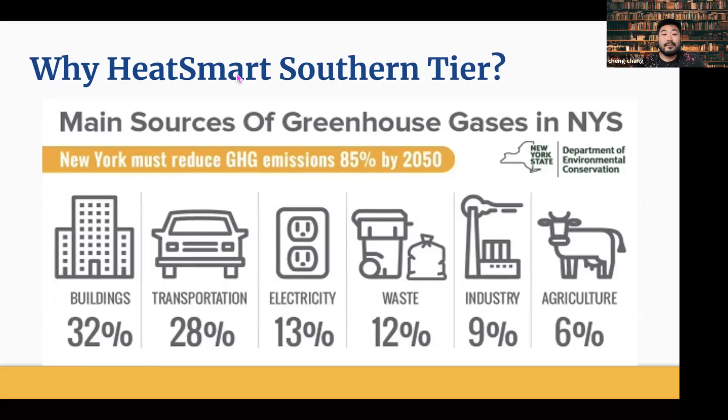Let's talk about the benefits of HeatSmart. Some of the biggest draws to participating in the HSST program are the individual benefits. Installing clean energy technology can help reduce your energy cost while increasing your home comfort and safety. You can also make a positive contribution to your local and global communities by reducing greenhouse gas emissions and increasing awareness about the importance of clean energy.

We work with lots of different municipalities in the southern tier to become clean energy communities. This is another program run by NYSERDA that gives awards to municipalities that make clean energy and other sustainable improvements. If you make clean energy improvements, like increasing the energy efficiency of your home or installing heat pumps, you earn points for your municipality. These points can turn into financial awards like grants to support other sustainable improvements.

So what does HSST cover? This program will mainly deal with weatherization and heat pumps. The goal of weatherization, such as insulation and air sealing, is to protect a home from outside elements in order to maximize energy efficiency. Heat pumps are technology that provide clean and efficient energy for heating and cooling your home. Our program focuses on ground source, air source, and heat pump water heaters. We'll talk more about these technologies in the next few slides.

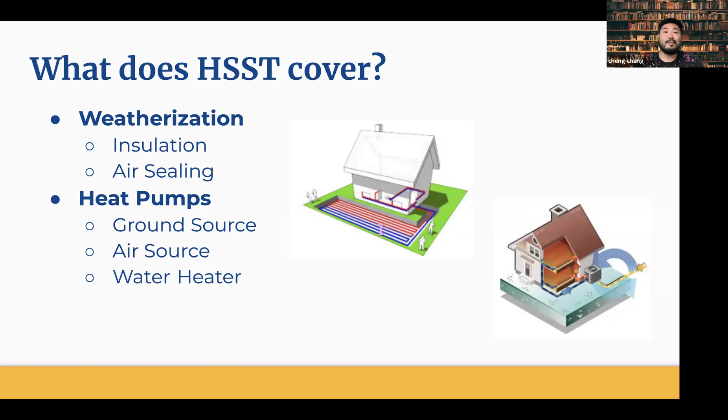Now please allow me to introduce Bhavi to talk more about HeatSmart technology. Thank you, Chang, for the amazing introduction. I will now move on to the technology portion of this webinar.

So the first step, if you were to go through our HeatSmart program, is weatherization. The diagram on the right shows common air leaks in a typical home. The red arrows show hot air escaping through the attic, and the blue arrows show cool air getting into the basement. Weatherization is the practice of protecting a building from these air leaks through insulation and sealing.

Reducing the air leaving and entering the house also reduces the need to burn fossil fuels or use electricity for temperature control. This optimizes energy efficiency, so it's good to weatherize your home whether you are getting heat pumps or not. If you have concerns about temperature regulation, ventilation, air quality, or moisture problems, these are also good reasons to look into weatherizing your home.

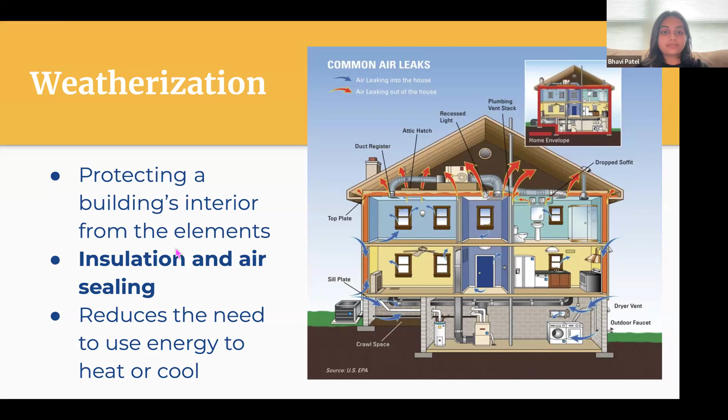There are many benefits of weatherization, such as reducing your energy consumption and costs. With a tightly sealed home, there is a lower chance that heat will leak out or that unwanted cool air will infiltrate your home, increasing home safety and comfort. If your home is properly weatherized, it will reduce drafts, improve humidity control, improve indoor air quality, and reduce the risk of ice dams. Overall, weatherization makes your home more comfortable to live in and more energy efficient.

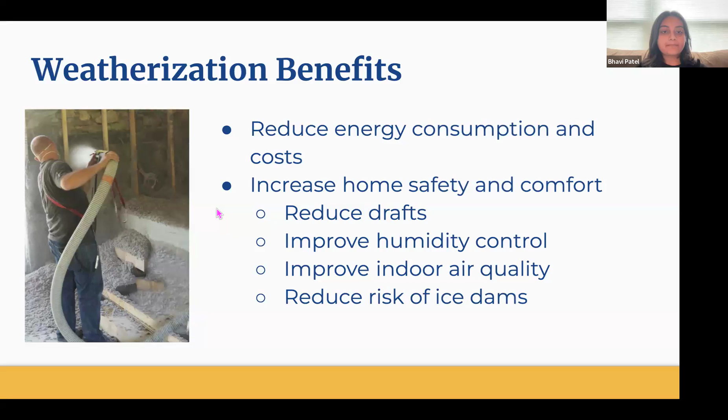Heat pumps are an alternative system for heating and cooling your home. While traditional systems use fossil fuels, heat pumps use electricity and offer a more sustainable way to heat and cool your home. This diagram shows how heat pumps work. There's always heat in the air and the ground, even in the winter, so heat pumps simply move heat into a space or out of it using a compressor instead of burning fossil fuels. This technology moves heat into your home in the winter and out of your home in the summer using electricity. If you have a refrigerator, you already have this type of technology in your home.

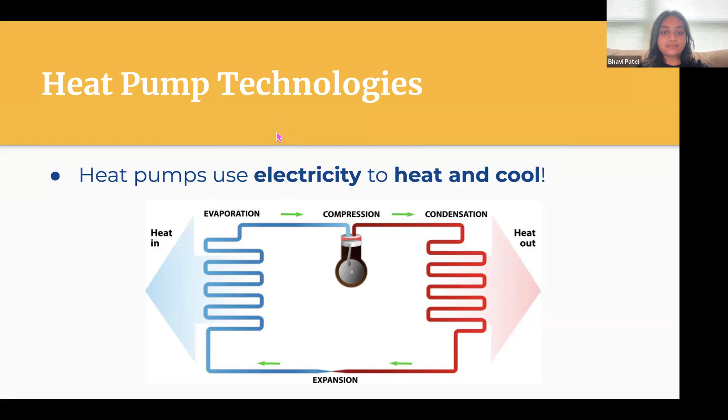There are 3 types of heat pumps that we'll cover tonight: ground source, air source, and water heaters. While ground source heat pumps can heat domestic hot water, air source heat pumps must be paired with a heat pump water heater.

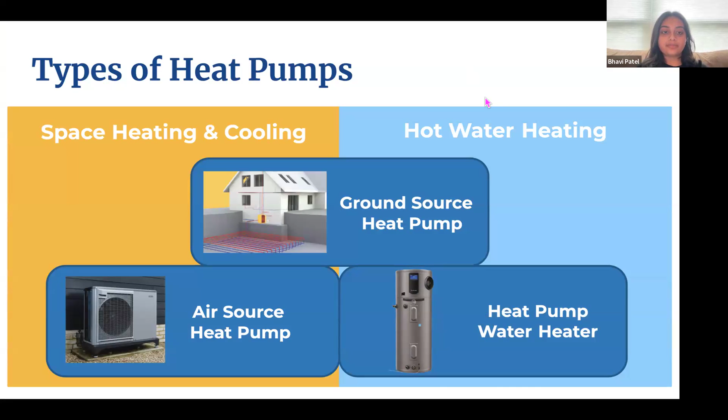Ground source heat pumps are also known as geothermal. About 6 feet below the ground is a very stable temperature. Geothermal systems circulate fluid in pipes below the ground, transferring the warm energy from the ground into this fluid. Heat is then concentrated through electricity and compression, and circulated through your home. During the warmer months, it even works in reverse, transferring heat from your home back into the ground.

There are 2 different types of closed-loop ground source heat pumps: horizontal and vertical. To know what type is best for you and your home, it is important to get an energy assessment from an installer.

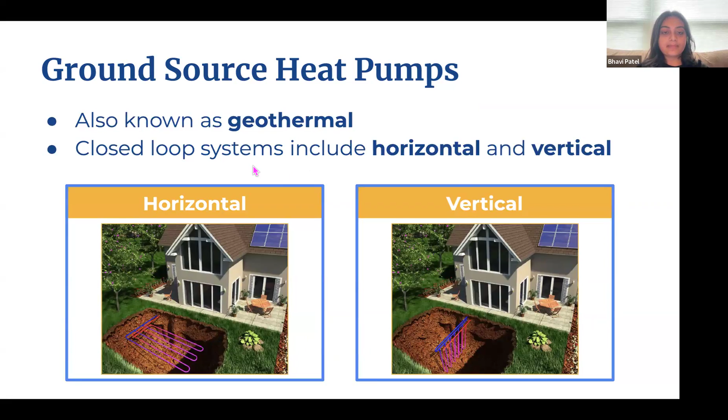There are many benefits of ground source heat pumps, including the positive effect on the environment, your energy bill, and your home. This system is very efficient in heating and cooling your home. It's long-lasting, and because it can include heating domestic hot water, it can completely eliminate fossil fuels in your home. This means no more expensive oil or gas deliveries in the middle of winter.

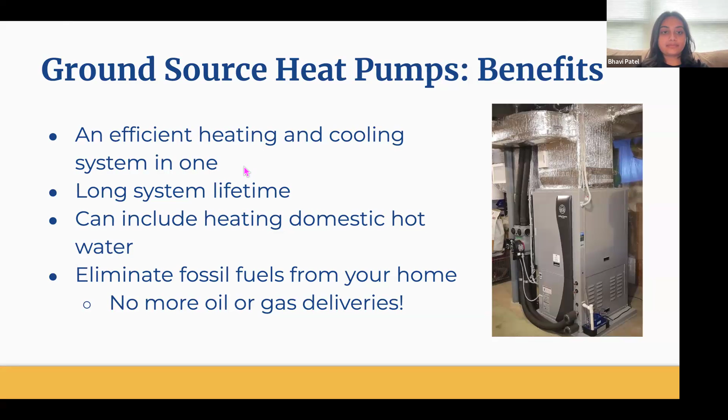The other type of heat pumps are air source heat pumps, which work similarly to ground source, but they take heat from the air and pump it into your home. These are typically a ductless system and do not require underground pipes like the ground source heat pump, allowing for easy and quick installation. Air source systems consist of one outdoor unit linked to one or more units inside your home. These units come in various styles to fit different aesthetics and cost preferences.

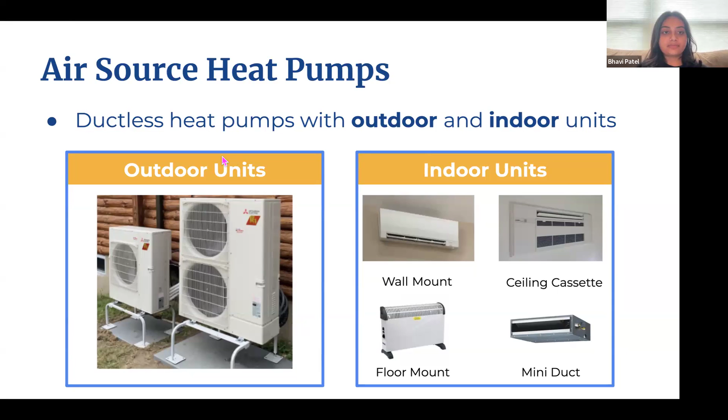There are many benefits of air source heat pumps too. They are very flexible because you do not have to replace your entire heating system if you don't want to. Allowing for zone control in your home, you can get just 1 or 2 heat pumps and use them for just a couple rooms. This can allow you to have air conditioning without the ductwork, and it also allows for quick installation. Lastly, these heat pumps are known to be very quiet.

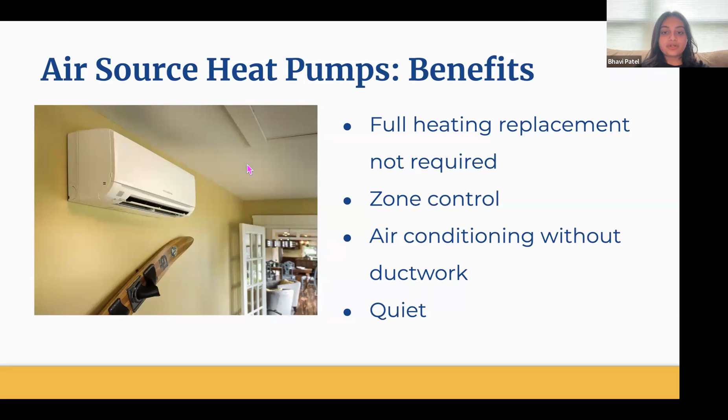The last technology that we will cover tonight are heat pump water heaters. These are basically an electric water heater with an air source heat pump on top. They are usually paired with air source heat pumps and use indoor air to heat the domestic water. Many times they have a backup system to meet high demands. They are very beneficial to install because they are efficient and can also serve as a dehumidifier.

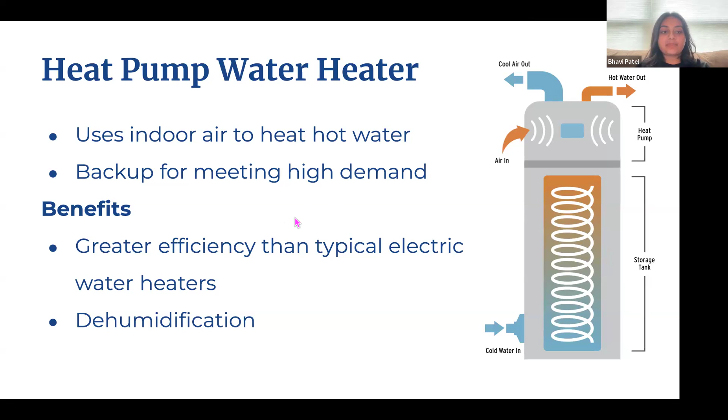Thanks, Bobby. So of course, this is all great technology, and we would love for you to learn more about this by connecting with us. But the big question on everyone's mind is always, how do we pay for this? How do we achieve that efficiency without breaking the bank?

So now let's take a look at the different rebates that you can put towards these improvement projects. These rebates come from both NYSEG and the federal government through the Inflation Reduction Act, and they can reduce the upfront cost of your project. All of NEST's competitively selected partners have the correct qualifications, so we can make sure that your project has everything it needs to qualify for these different rebates.

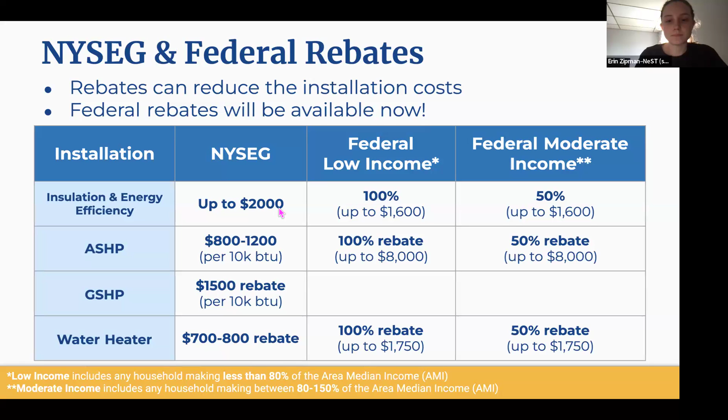And then there's also a New York State tax credit for ground source heat pumps. I would also just note, you can split some of these projects over more than one year to maximize the number of credits you can claim. For example, a weatherization project is capped at $1,200 a year, which you could get for spending $4,000 on installing weatherization updates. So if your project will cost more than that, you could split it up over multiple years to get the maximum credit each year.

There's also different financing options when it comes to these projects. NYSERDA has two different types of loan options. One of them is the Smart Energy Loan, and one of them is the On-Bill Recovery Loan. They're basically the same, they have the same conditions. The only difference is that the On-Bill Recovery Loan is paid on your utility bill over time. Then there's different financing that you can get through manufacturers like Enerbank. And then you can go the traditional route - you can go through local banks if they have a better interest rate.

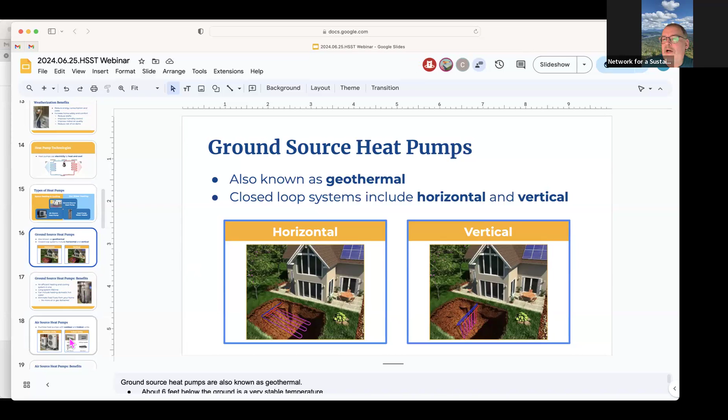The other thing is if you really don't have the space, which is relatively rare but not always, you'd have to go with an air source system instead. With an air source system, the outdoor units can be mounted higher up, and the indoor units obviously aren't going to get compromised, one hopes.

So those outdoor units, can they be put on the roof or hang off the side of the house? They can be put on the side of the house, potentially on the roof. I think the roof might be a bit of a complication if we're not talking about a ducted system.

Do you have ducts in your house? I do. Do you have a furnace currently? Yeah, I have a high efficiency gas forced air system. Forced air—so that's again beyond my pay grade. That's a case where you'd really want to have an assessment to have somebody take a look at it.

The one thing I can definitely tell you is that the equipment has to be moved up higher. And then the question becomes, where in the house do you have space to do that? So that's a project in and of itself.

What we could do—first question though is, do you already have a well-insulated house? Have you taken care of that? No, it definitely needs more insulation. After the flood,

we really ripped out so much, and then didn't put any back in the floors, like in the basement. Right, so just the walls—we did all the way up for the first floor. And it was just like me doing it, so there are definitely spots where I didn't get in. I didn't know the importance of filling in those really small holes and stuff, I was just doing it.